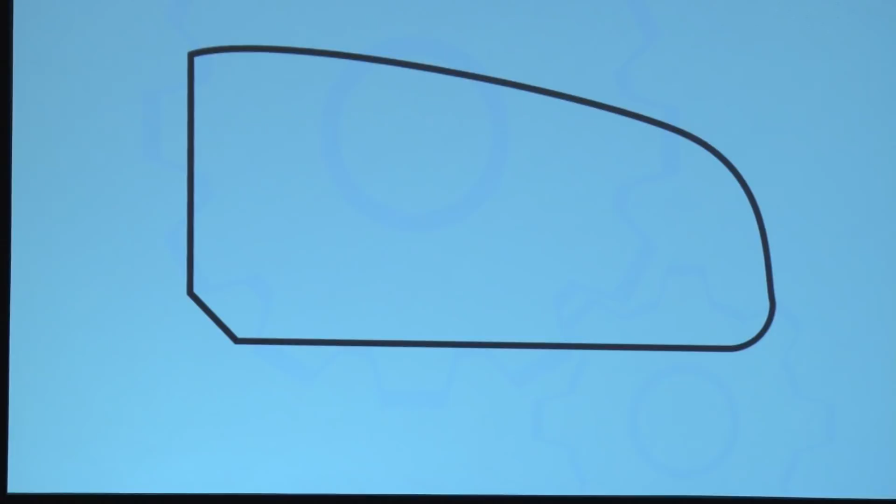So you give them a simple part like this, and you say you can use your calculator, and you might give them a workbook for trig, and you say, program the part. And all I want you to do is this. It's a little bit - I want an offset, but you can't use G42 and that kind of stuff, so you have to build the offset in. You have to trig out the locations of the tangency points.

And in the old days, we had a little desktop mill, and we would have these people MDI it in, but basically punch it in, and we'd all gather around and make bets. We're going to cut some wax. And I don't care who they were or what school they went to, every hot shot that we ever had do this failed.

You know, they got to do a G02, a G03, and it'd make these big circles. Oh, by the way, you couldn't use R's; you had to do IJKs. So if you're part programming, you know the routine, right? They all failed. And what's cool about that is it gives them a sense of how difficult the job is for the people who do that work. That's one. Two, it gives them an idea of what the software does for the people who utilize it. And it takes them down a notch, which is always fun.

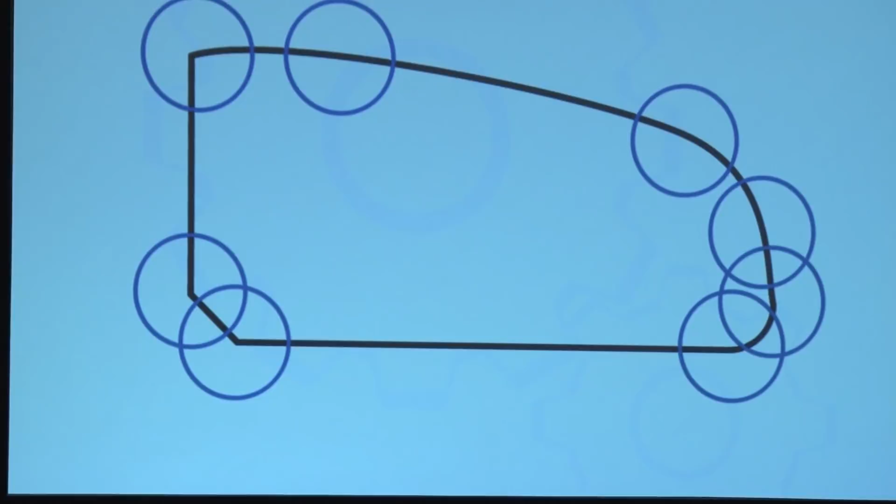So what's automation? This is about automation, right? What is automation? What do you guys think automation is? Let's figure out some ideas. Now, sometimes automation just strikes fear in people, right? Automation, uh-oh, it's going to take my job, maybe.

But automation can be in baby steps, little tiny things. Here's one that you guys kind of do all the time, and you don't even know it's automation in one sense. So you get in your car, and you're going to take a long trip, and what do you do? You set your cruise control, right? Is that automation? Sure it is. So every once in a while I rent a car, I get in, I set the cruise control, and I'm not paying attention, and I get up behind the truck, and my car slows down. And the truck moves off, and my car speeds up, and I'm not touching anything. So it's another level of automation - adaptive cruise control. So every car you buy today has at least cruise control.

The new cars, maybe it's an option. The higher-end cars, it's by default. You have adaptive cruise control. So they talk a lot about the autonomous cars, you know, and where it makes news is when they crash. You know, okay, fine. But automation has all kinds of things. And for us, when we talk about what we're going to do with automation and part programming, you can go low, medium, and high.

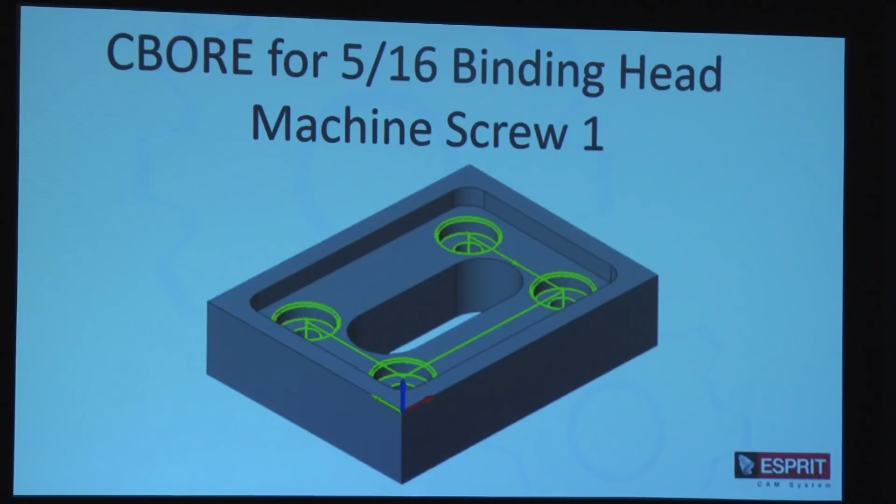And based upon that, how many of you guys know how you would want to manufacture those holes? Probably everybody - I'm going to do a pilot, a peck, a this, a that. It's going to be a multi-step process, right? And you're going to have multiple tools potentially as well. And that's important, okay, guys - to give me what I need so I can make it go faster.

And if I can do that and store as a group all the tools and the cycles I need, I'm not doing those one at a time, I'm doing them all at once. And I'm not doing it on 1 hole, I can do it on 50 holes at the same time. What do you get? You get automation, okay? It's simple automation - it's not scary, makes you more productive, less problems.

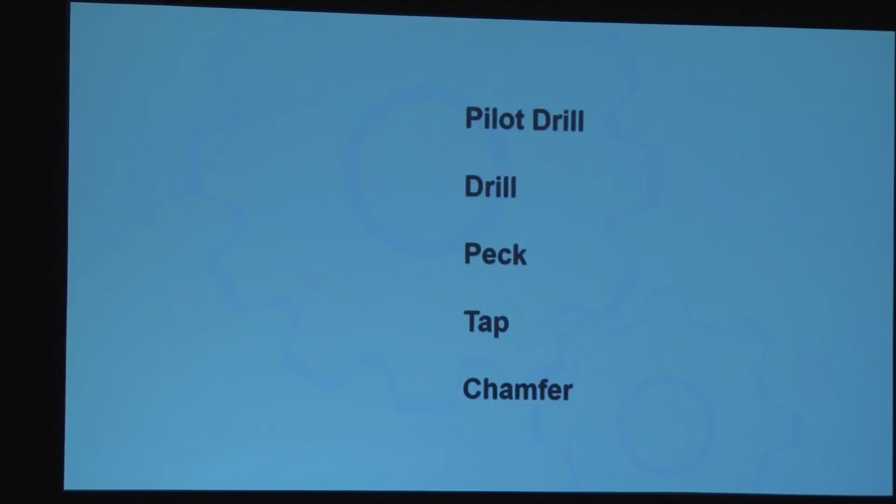Hey, if something goes wrong, it's the engineer's fault. But it works great, okay, but it is automation. So as a group, it gets applied, and in our world, certainly it calls the tools, it does everything that you might need.

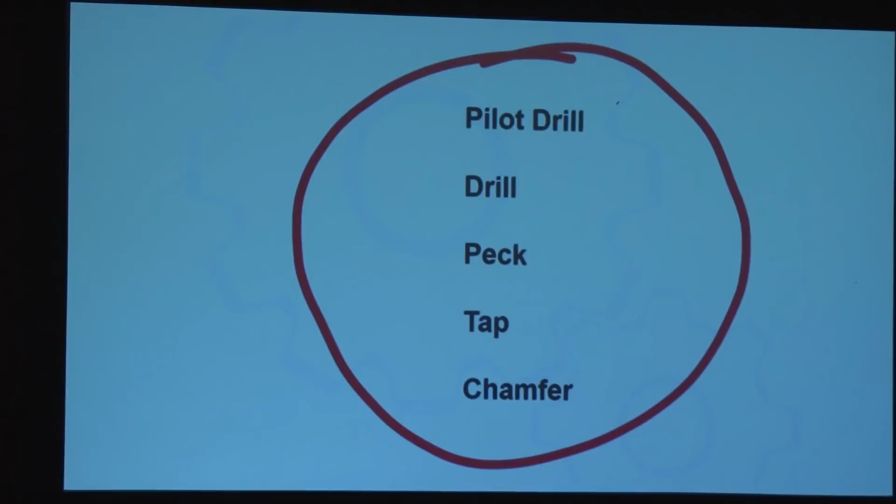You can think of certain kinds of features on just about any part. You've got holes, you might have some kinds of contours, and you've got pockets. So those are feature families you could tap into to help automate another step. If you do a lot of pockets, a lot of electronic housings, different things, you can build on top of your expressions to tap into that environment and be more productive.

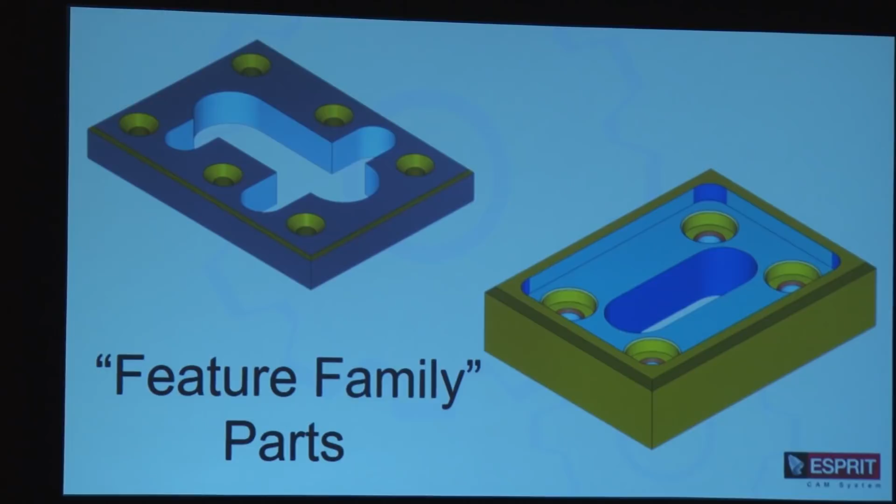Here's some feature families. Very simple parts: holes, slots, pockets, and even edge chamfering. The edge chamfering is a contour, it's a feature, a family of features.

So here's the Marlboro Man of manufacturing. Inside his head, and a lot of you guys, is a ton of information, a wealth of information. He's like 70 years old, he's just young looking. And he knows everything about his environment.

He knows what kind of machining cycles he's going to use on different kinds of materials, the tools, how he might grab a certain tool depending on the maximum radii, the minimum radii of a part in a pocket, feeds and speeds, blah blah blah. He knows all this stuff. Where does it live? It lives in his head. Can we extract it so that you can use it, and you can use it, and you can use it?

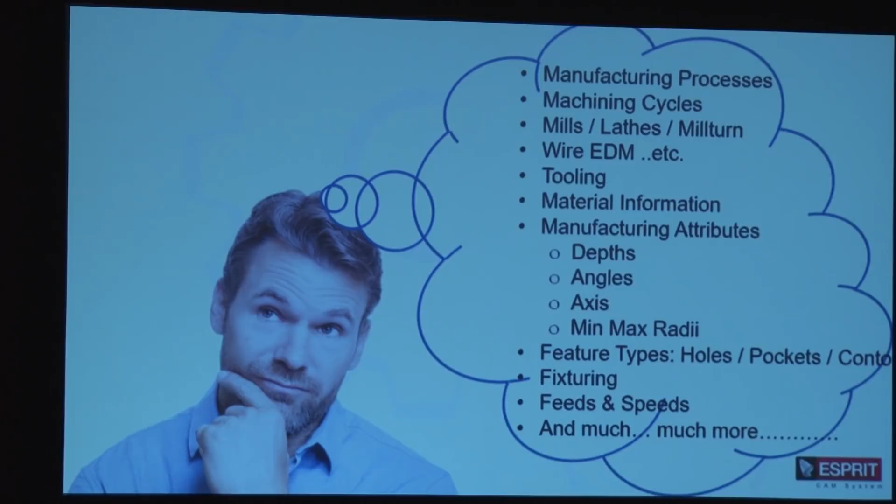So let's pretend he's our master. We're going to talk about knowledge-based manufacturing now, a more automated level of it. We already did a little bit of knowledge-based manufacturing on the other stuff, but now we're going to create a database. That database is pulled out of his head and put into an environment he can use. Maybe he's the only guy in the shop, but now he can tap his own stuff quickly. Or maybe he's got 3 young engineers or part programmers, millennials, and he's going to show them quickly how things are done because he created it.

So he gets his information, he plugs it into a database. Believe me, I'm simplifying this to be understandable. And then these guys, when they're on the computer, they're going to tap that database and be able to program quicker. They're not going to have to reinvent the wheel because he knows what's going on. He's lived that life.

So the next thing you might say is, okay, that's pretty cool, but I'm a one-man shop, I'm a two-man shop. Well, I have end users that are enterprise-wide multinationals. I'll give you an example of a customer with 120 plus licenses. They serve everything out of Michigan, the database.

They serve it to Czechoslovakia, the Netherlands, Brazil, the US, Mexico, Singapore. Nobody touches the database except the master, or in this case, a group of 4 guys.

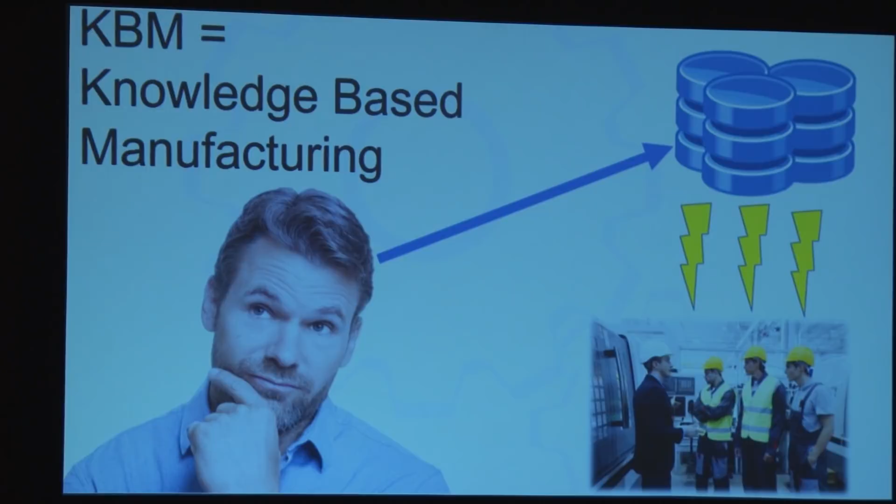Go Army. I'm involved with an Army group, Benet Laboratories up in upstate New York. They're attached to an arsenal called Watervliet, and we're in a pilot program. Our pilot program is called Smart Machining Solution, SMS. I hate acronyms, and actually in the back of our overview of this giant project, there's like 4 pages of acronyms. It's like they're always talking like that. I say, I don't know what you're talking about, can you give me a glossary?

So the center of this would be the CAM system, and it's talking to the machining cloud, which has a digitization of tooling catalogs, fixturing. It's talking to tooling optimization software. It's talking to tooling databases. So the idea is create a lot of your feature family information knowledge base, be able to talk to all these other things, and you will be able to be more productive.

And the guy who's actually the brainchild of this, believe me, it's like a 6-year project. They spent a lot of money. It's only a pilot project, but as you bring in young people into this manufacturing world, it's the millennial thing. How easy can we make it? Can we tap what our history is?

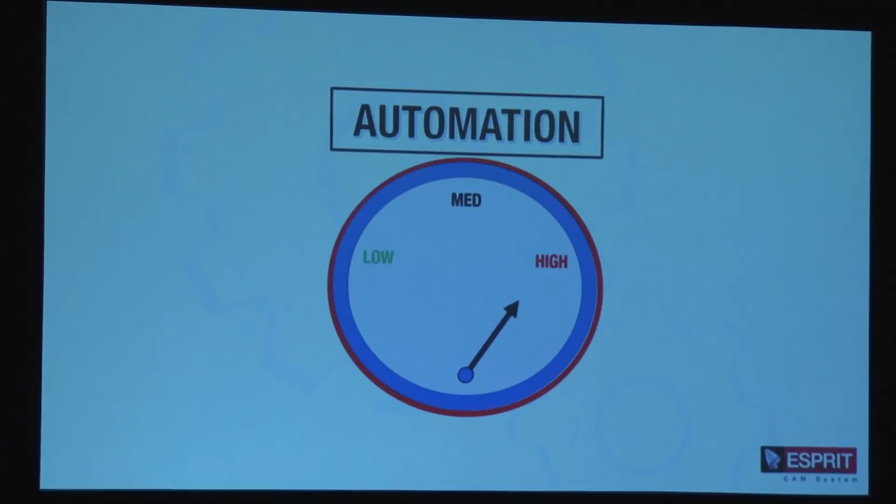So let's go high automation now. Black box. That's kind of fun and scary. Everybody know what those are?

Yeah, that's that stuff, like ClearCorrect Invisalign. I don't really know how it works, but I know that you're going to have a series of mouthpieces, and each mouthpiece is based on your impressions, okay? So what can you do to automate that? How many programs do you think need to be cut per week to satisfy a certain size of people who are using those to straighten their teeth?

Now, I always say it's an old joke. Nobody ever laughs at it. It even works in England. See, nobody laughs. You know, what's his name? Mike Myers did it. You know, it was the big joke in his thing.

But you can bring in an STL file that's been coming out of that mold world. That STL file in a black box gets plugged in, gets positioned. You do rough, you do semi-finish, you do finish. And it spits out NC code. And there's a ton of machine tools out there to cut.

How many? 10,000 a week? 20,000 a week? 50,000 programs a week. Now we're talking unique programs, right? Because everybody's set of teeth are a little bit different. That's where automation works. You can't have 10,000 part programmers cutting those things or programming those things. So automation works.

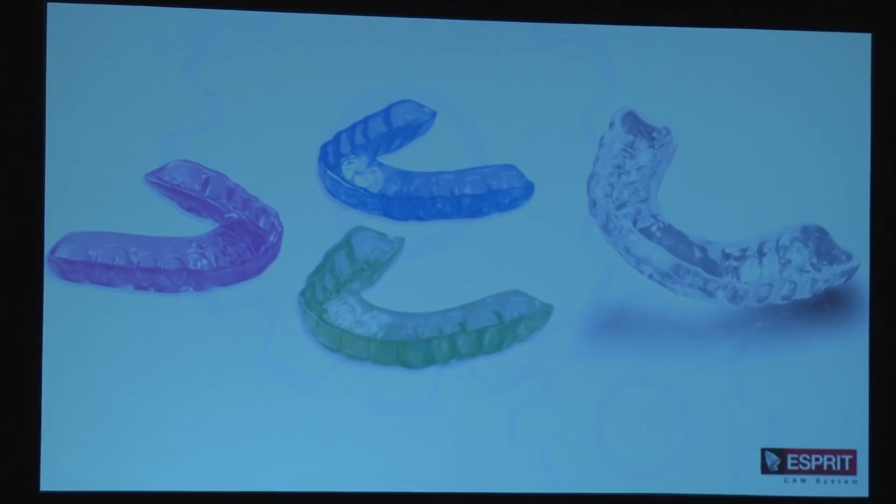We have another one, and this one is, these guys make motor shafts. And the motor shafts, it'll come out of a CAD system to design. It'll get dropped into a directory. The software's listening in that directory. Is there something there? Okay, there's something there. It gets grabbed, it goes into the automated deal. The features get recognized, the tool path gets applied.

The NC code gets made, depending on what features it sees and what machine tool it's going to go to, because those are still choices that need to be made, but it's made automatically. And then it queues it up into a direct numerical control system, and they just start running them.

Now, it'll do a spectrum like this. Now, in the politics of the world, we did this for another company, and we say, okay, it works for this spectrum of parts. And the guy would always give it this one over here. And he would say, it doesn't work. Of course it doesn't work, okay? Don't give it that. But then it would fall apart.

Why didn't he want to do it? He was afraid, which is okay. That's just how life is.

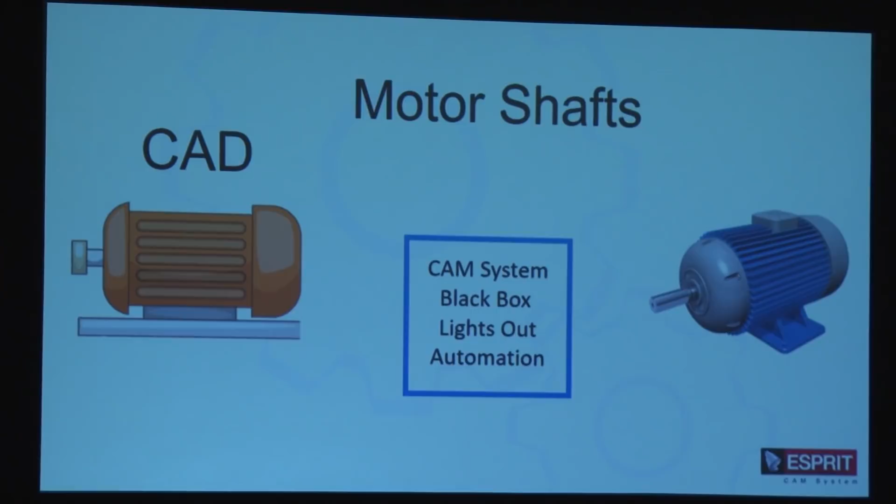I got two stories about this one. One is successful and one is, I find it interesting. No judgments on my part, I just find it interesting.

Back in about 2000, we had a lot of software in an aerospace company, and the guys who programmed the wings, believe me, there's thousands of holes in the wings, okay? And there's a machine that's like a two-story machine. It goes along the wing, and all you got to do is give it two-dimensional coordinates, and it figures out the 5-axis vector. It's really pretty cool.

They say, hey, we need help programming the wings, and they give us something. There was PMI that existed, so each point was a drill hole of some type in a fastener. There was a key of 10 characters that would define the hole in the fastener type. Thousands of them. So we're in a big conference room, guys around the walls, and I ask a question.

The question I knew the answer to was, is there any kind of rules you could set up to enable you to be more productive? Two people down on my side, a guy leans forward and goes, yeah, we could do all these things, it's really cool. He's young. Then the guy two down from him leans forward and says, last in, first out. And he leans back.

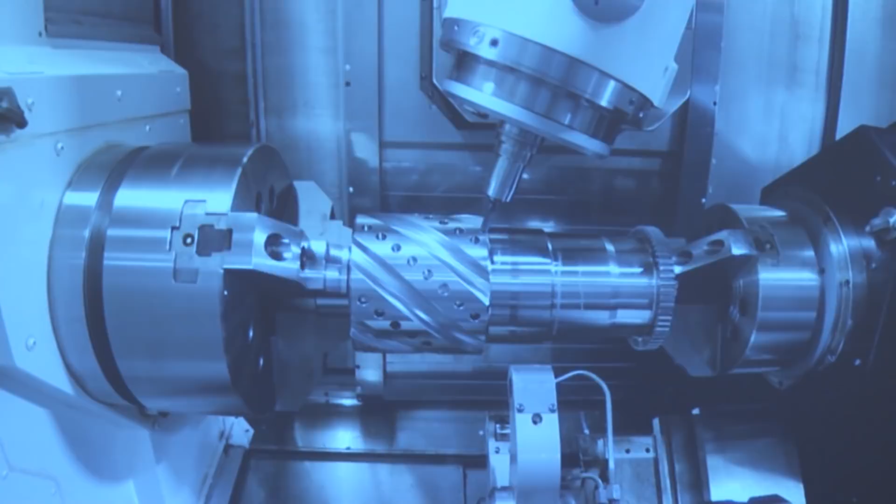What did I do? Oh, there we go - I'll let this run for a second. The digital twin world is expanding, so everything's being digitized, and we're challenged with how much data we have to deal with in digitizing our environments, whether inside the machine tool, in the computer, whatever. You're seeing things like tooling catalogs being digitized in the CAM software world, with more details on tooling, setup, everything to make sure life goes well in that environment. You're going to see a lot more of it. We stress out our computers because invariably they're too slow.

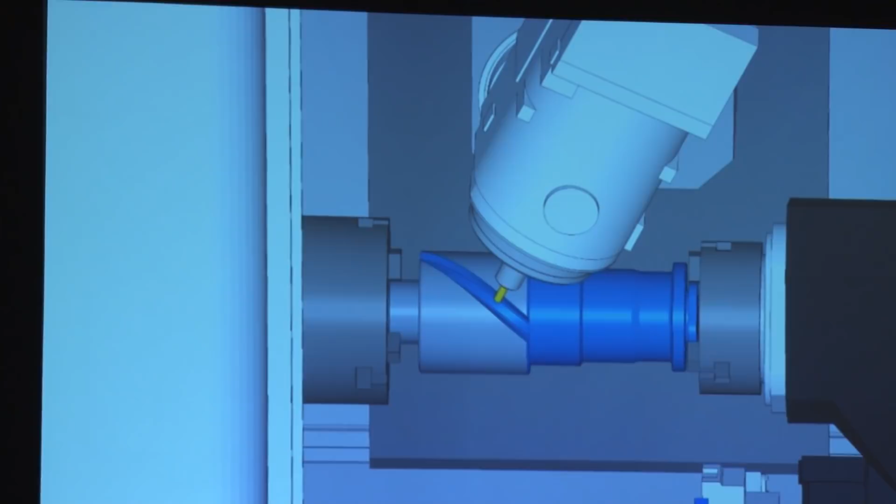So for people who might want to embrace automation, I said early on, is it about technology? And I think it's more about people - who's making decisions to do that, how far you want to go, who you might hire to help, how you're going to deal with your future. These are all things that are part of a process that in today's manufacturing world, you're going to have to deal with one way or the other.